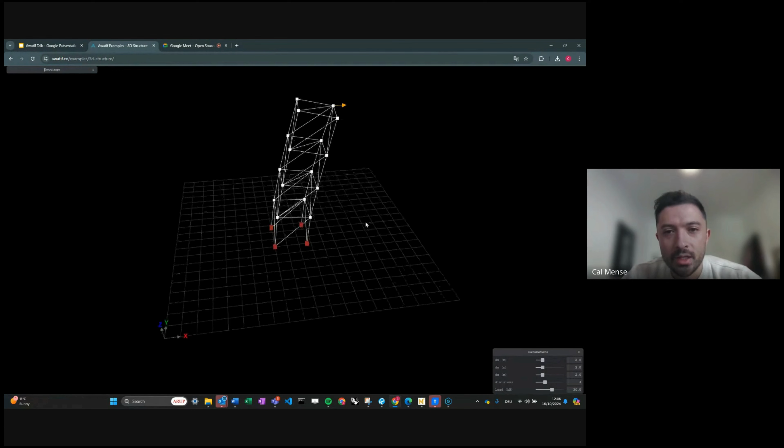So this is our homepage where we document the entire code and tell how this is being used. And if you go here onto the examples, you can see our different apps. So if we jump, for example, into this app, as you can see, it's completely web-based, so it can be accessed just by clicking onto this link. And as I'm playing around, you can already see how light it is as well. So here in this case, we have a 3D structure, and as you can see, we have this point load here. And as this is parametric design, we have these input sliders.

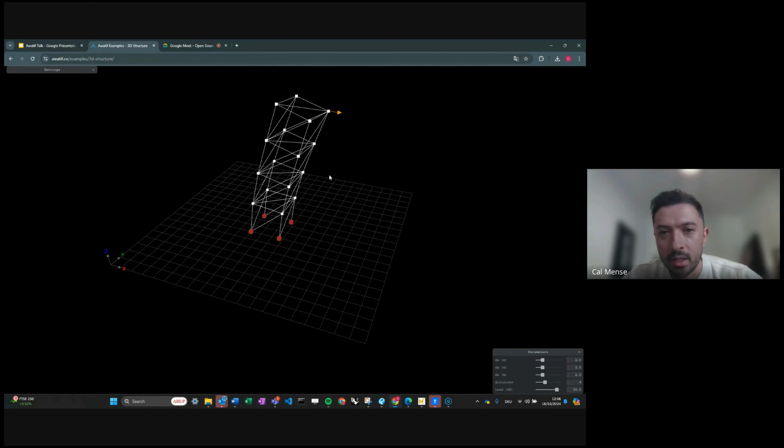So if I change the load, you can see how the deformation increases and decreases. So as you can see, it's very seamless. So we have our own FE solver that's constantly working in the back, and it updates the results automatically. So if we, for example, have a look at the normal forces and realign the visualization, you can see that we have our normal forces, we have tension and compression here in red, and as I'm moving the sliders, you can see that the results are all calculated seamlessly.

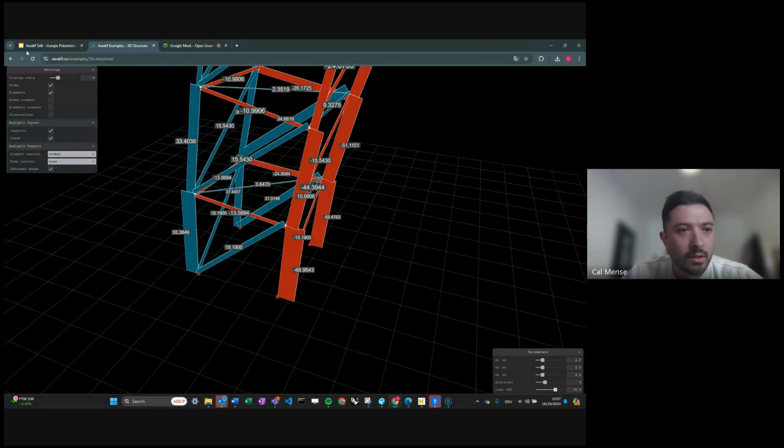Yeah, so we have different apps here. In a little bit, I'm also going to show you in more detail our truss designer. But for now, let's jump back into our presentation. And as I'm doing structural workflows on a daily basis in my work, I want to tell you a little bit how it's currently done. Basically, what I also explained with my example of the column design, it's a manual sequence of using different programs, meaning you need different programs and different licenses as well. And for each step, basically, you would need to transfer the data manually from one program to another one.

So this is obviously very time consuming, and there's a lot of room for errors. And it's also quite expensive as you need a lot of different licenses. And also, once a design changes, you would need to go back into the workflow and do these steps again.

So nowadays, this workflow becomes more and more digital. So especially with the help of Rhino and Grasshopper, these workflows are getting more automated, meaning that the data transfer is more and more automated and digital. This is obviously a very good development. So the engineer becomes sort of the digital architect themselves.

But I'm also using Grasshopper a lot on a daily basis, and I know there's always a risk that these scripts are becoming very complex, meaning that it's hard for other colleagues to reuse them. So a lot of the times the scripts are just made for one individual project, and they are not really reused again.

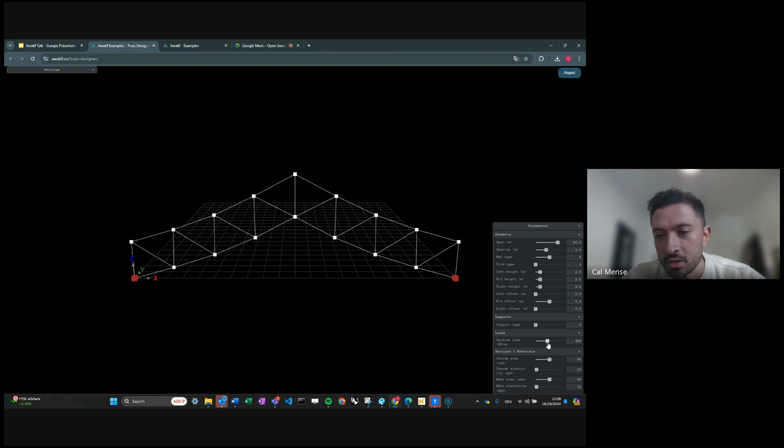So for example, by changing the web type, we can quickly change the geometry. We can change the loads, and as you can see, the deformation shape changes as well. Here, we have a connection designer implemented. Here you can see the color indicates the utilization ratio. And as I have no load, you can see all the nodes are basically blue, which means they are utilized well. And as I'm increasing the load, you can see that each node one by one is failing.

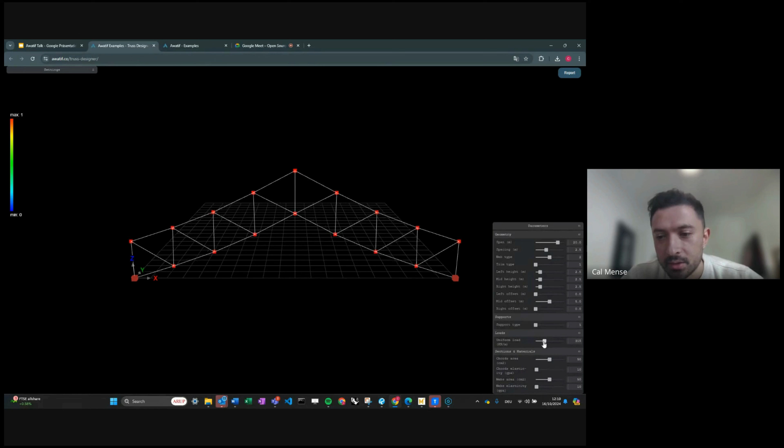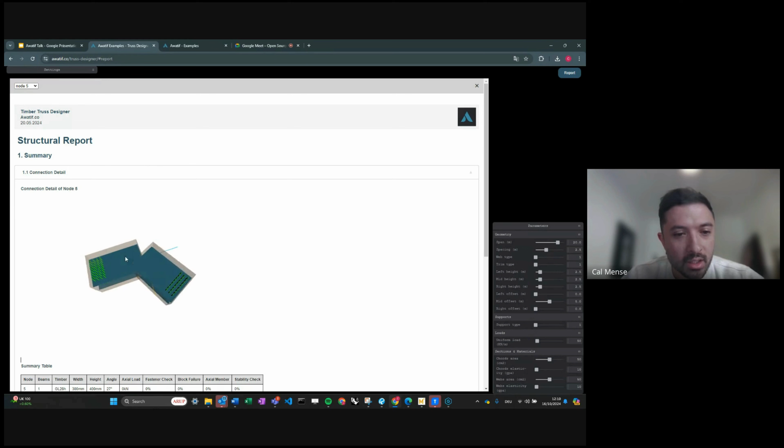Yes, so the biggest advantage and feature that we have implemented into this app is the report function. So here in our report, we can now select a node that might be critical for us to understand. So let's, for example, click onto node number 5. And here you can see we have a visualization of our node. So we have a slotted plate connection with fasteners. And as I'm increasing the load, it automatically calculates the amount of fasteners that are needed. So you have a clear understanding of how the connection would look.

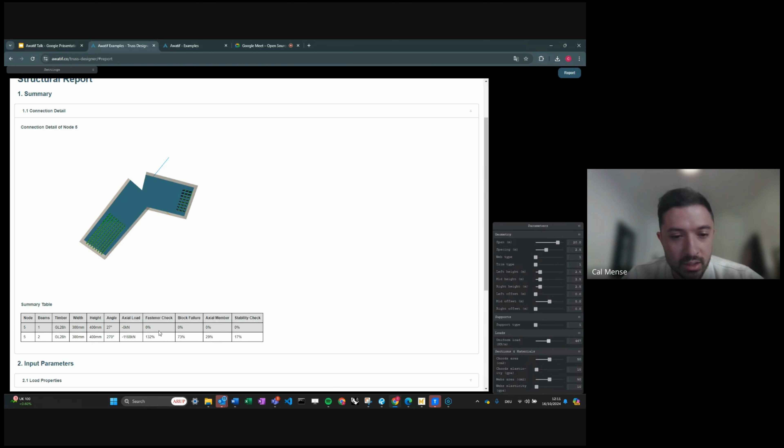Here we have an overview of this specific node and the beams and all the information that you need, and also a summary of the utilizations of the different checks. These checks are documented here in the following. So we have the input parameters, pretty much everything you need to calculate, for example, the spacings, and then the fastener capacity as well. And then lastly, we have the connection design and member design. So everything is documented. So it's not really a black box. You can know exactly what's being calculated according to the Eurocode. And if you have a compression force, you also have a stability check here as well.

Another big advantage of having everything within one program is that you have the data stored within one program, which means here you have a big summary table with an overview of each single beam and connection, and the amount of fasteners that is used in each connection as well. And here you have an overview of the checks. That also means that we have the exact quantities for this entire structure.

So you have a bill of quantities as well. So in this case, you have used 103 meters of timber, which accounts for this amount of volume. And you can then also calculate the carbon footprint of this structure. So by this approach, you have basically closed the cycle of this workflow.